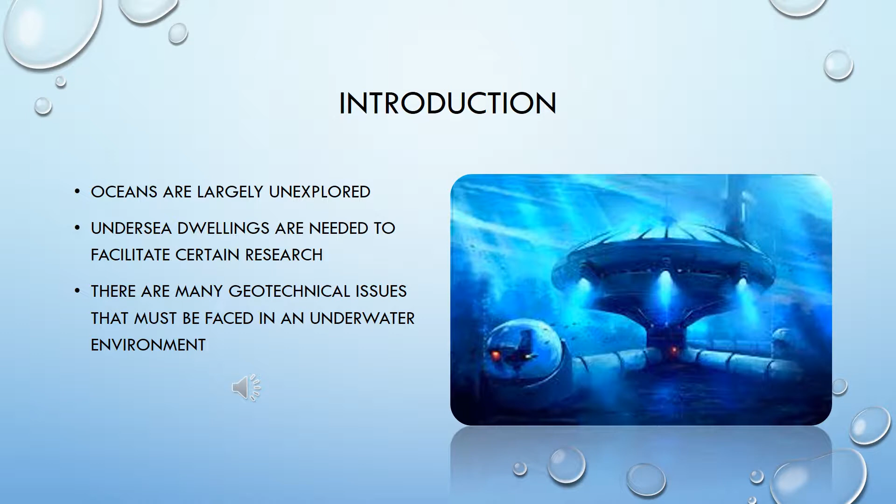Soil friction is one of the most important factors in the bearing capacity of a soil. This can be clearly seen in the famous Terzaghi equation, where cohesion of soil and the friction angle play such a major role in determining the bearing capacity of a soil. Complications begin to arise when looking at the soil friction in a submerged environment.

This is because the soil friction is highly variable and the cohesion does not necessarily have a linear relationship to time. Studies have shown that in cases regarding soils with a high silt content, the cohesion was increased when the soil was saturated. The soils that had a high clay content behaved differently though, with a decrease in cohesion when the soil is saturated.

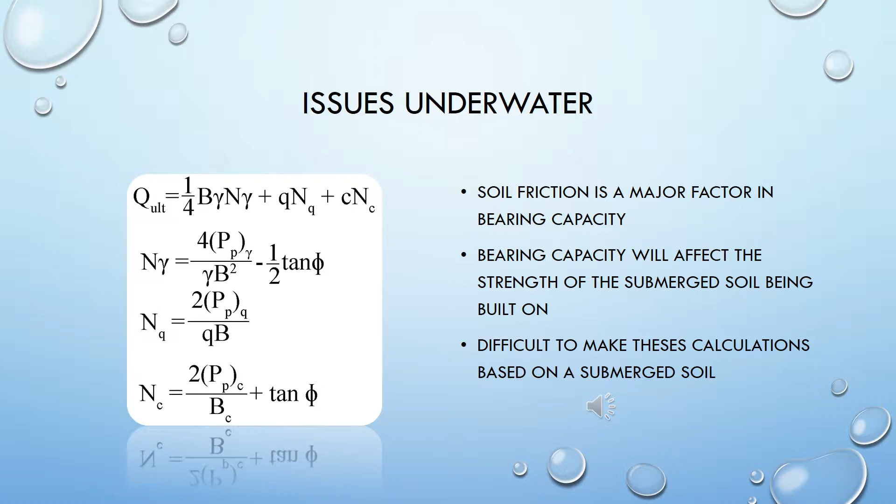In bridge structures crossing rivers or other moving water bodies, the smaller soil particles are often swept away by the moving current, which leaves sands as the primary soil type that is being designed for. When looking at submarine building possibilities, the soil properties become much more variable. This is due to the fact that the submarine structures have the possibility of being constructed for the most part on any area of the coastal sea floor. This means that the soils will not be quite as consistent as they are beneath bridges.

Soil friction is reliant on water content, but it is also reliant on the makeup of a soil sample. Taking soil samples underwater is full of inherent sources of error and difficulty. The process of taking boring logs and performing in situ testing are also more expensive underwater than on land.

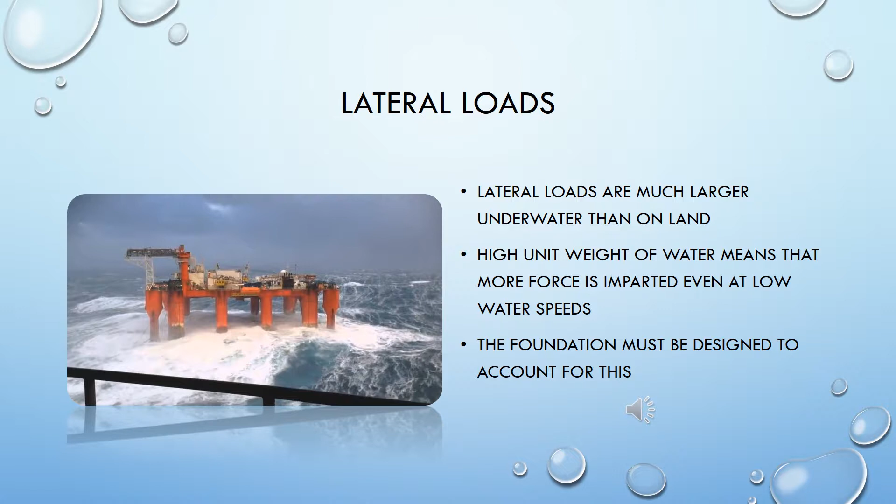Another major issue with an underwater structure is that there are a significantly larger number of lateral loads that the structure and foundation must face. These can come from a variety of sources, but one of the major ones is the constant water movement. Water has a larger unit weight than air, which means that it will impart a larger force than air would on an above-ground structure. To accommodate these forces, the foundation must be specifically made either deeper or much wider than it would need to be on land for the same structure.

While there are not many undersea habitats, there are a small number that already exist. By looking at these, more issues surrounding the construction and foundations can be uncovered. Understanding these hurdles can help decrease costs and risk in the future. The first underwater dwelling to have people live in it was the Conshelf 1. It was built in 1962 under the guidance of the famous ocean explorer Jacques Cousteau. This structure was very temporary and only used as a proof of concept for Conshelf 2.

This structure was much larger than the first, but it did not use a solid foundation. Instead, it was supported by legs with large metal plates at the bottom. The plates act as a sort of artificial footing for the structure. In this case, the large metal plates are not formally rooted in the soil. This means that they are more prone to washout, but they are also able to adjust to these changes because they do not have a rigid connection, but rather a hinge. While this was ideal for the mission it was used for, this is not a long-term solution to submarine foundations.

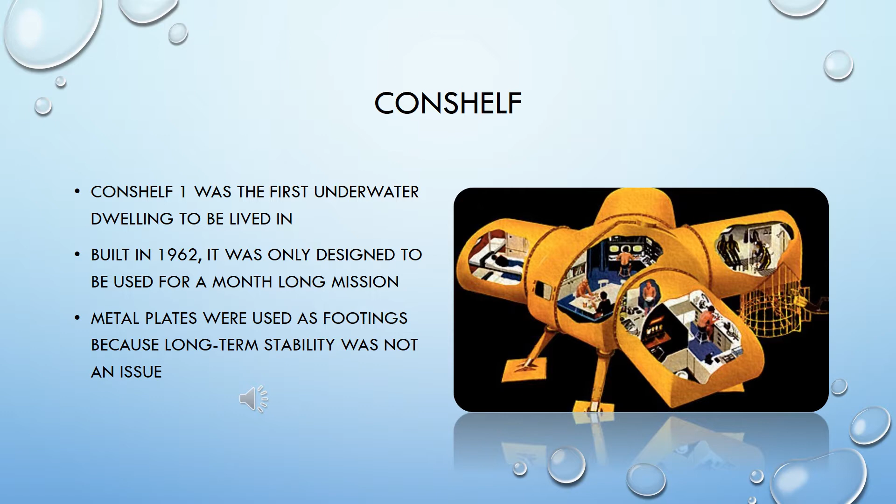The Hydrolab was a more permanent structure built in 1966 off the Bahamas. It was built by the National Oceanic and Atmospheric Administration as a research station to study sea life long term. In order to increase the life of the structure, it was built on a large concrete foundation. The habitat was attached to the foundation by 4 legs that were bolted into the concrete. This massively increased the structure's lifespan as it was not decommissioned until 1985.

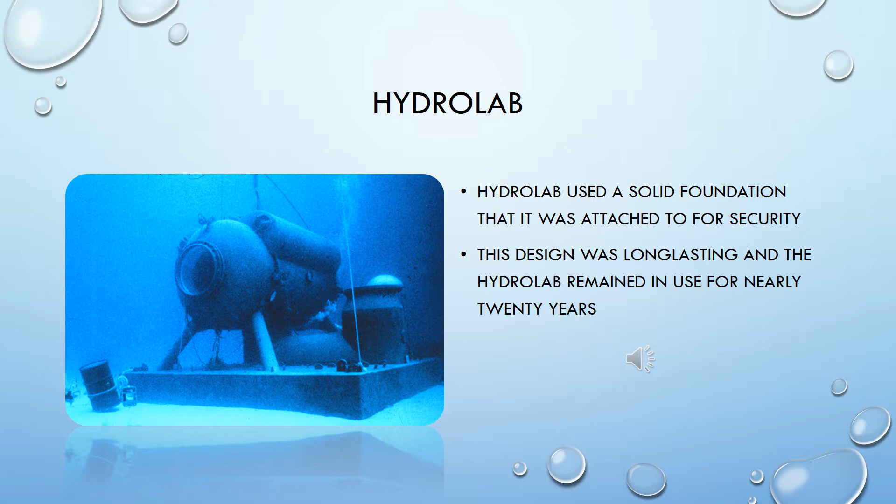Due to the depth of the foundation slab, washout was not a major issue, and the small size of the structure meant that there was little to no differential settlement due to weight. The life of the Hydrolab proved that a slab foundation can work for a small structure, but it wasn't until much later that research was done on the possibility of a larger one.

Aquarius is a massive undersea research station off of Key Largo that has seen extensive use by various groups, including Florida International University. This structure is supported by massive steel legs on wide footings. Because of the scale of the building, maintenance is of utmost importance. Washout has been a significant problem with the Aquarius sea base. In order to combat this, divers have resorted to building a wall of sandbags into the soil around each footing.

While this may seem unorthodox, the same technique is used in slope stability as a support for dirt embankments. Sandbags are used above ground to create solid groupings that can resist lateral pressures of the soil much greater than loose dirt would. Even though there is no slope in this case, the goal is still to resist lateral movement of the soil. The fear is that washout would harm the structure rather than slope instability, but the concept remains the same.

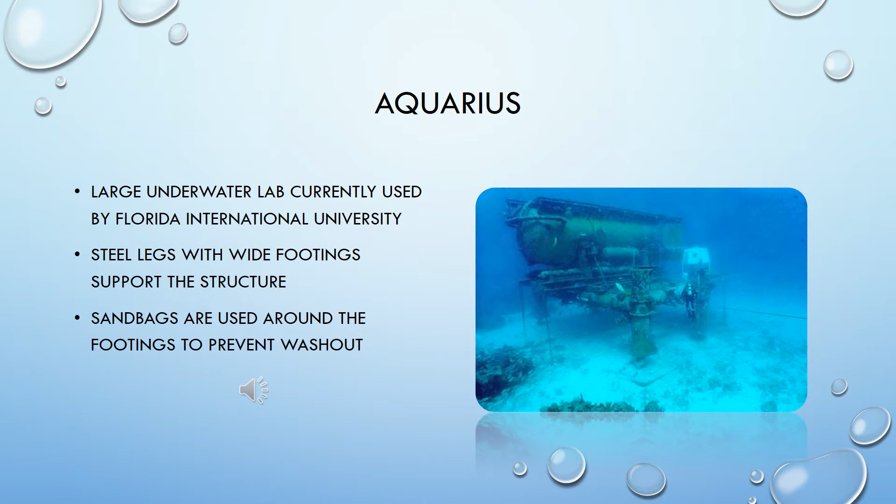Under is a partially submerged restaurant currently being built in Norway. The main structure was built above ground and it was then lowered onto a continuous concrete foundation. With a structure this large, serious support is needed to keep it from facing settlement issues. Individual footings like those that have been mostly used before would not provide the necessary stability to hold the structure.

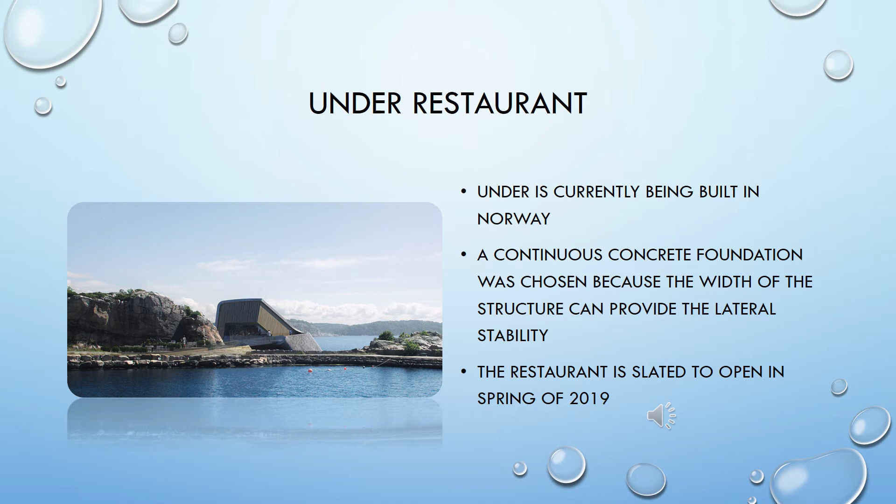The building is also helped by its massive footprint. In this case, the horizontal space was needed anyway to provide massive views of the ocean. It is wise to design the function of the building and the structure in tandem so that the two important aspects are working together.

Even though underwater construction has been going on since the 1960s, the field still seems to grow ever slowly. Like space, the oceans can be a harsh and difficult place to put permanent structures. When looking at the history of submerged construction, the progress made in overcoming geotechnical hurdles becomes clear. It may not come today or tomorrow, but someday soon, long-term underwater construction will become a viable option for both scientific and recreational purposes.